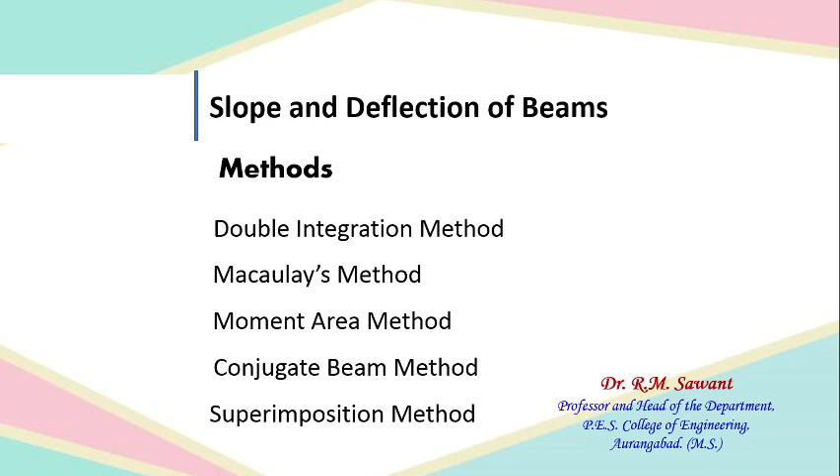Let us first see what are the various methods by which we can find out the slopes and deflections for the various types of beams. First is the double integration method. Another is the Macaulay method, third is the moment area method, fourth is the conjugate beam method, and one more is the superimposition method. Out of all those, today we are going to understand the Macaulay method.

This method is actually a very convenient method. We can say it's a sort of double integration as we did in the double integration method. Here specific rules are set out by which we can find out the slopes and deflections at the required point. The first point to take into account is that in this method we have to take sections between two consecutive forces, loadings, or reactions. There will be a number of forces, including active reactions as well as reactive reactions. There are active forces on the beam and there will be reactions offered by the supports.

So all these active and reactive forces are to be treated while understanding these sections. The first rule is that whatever sections we pass must be taken between two consecutive forces. Next, this particular method is to be utilized whenever we come across point loads or discontinuous type loading. In that case this method works very well. These are the two things we must always follow when talking about the Macaulay method.

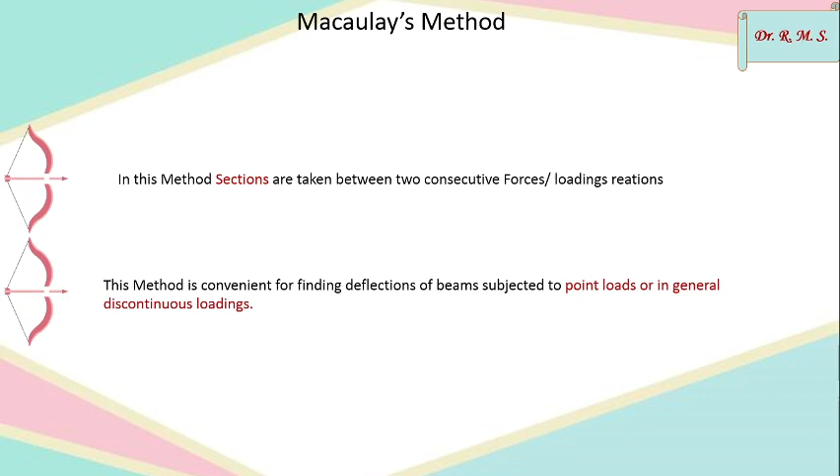Let us see what exactly the Macaulay method suggests and what are the various sets of rules we have to follow for finding out the slope and deflection by the Macaulay method. So here we are going to see the procedure as well as the set of rules.

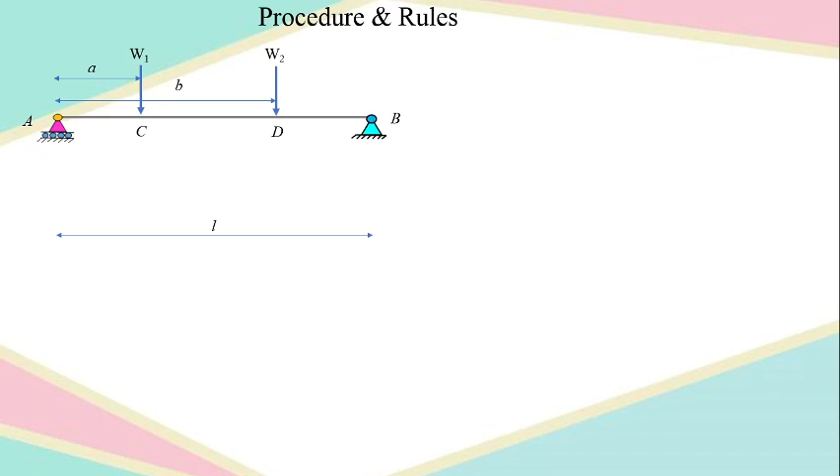Here comes the first simply supported beam which has two loads, point load W1 and W2. The span is L. The line of action of W1 and W2 are also given. W1 is acting at a distance of A from the left end support A, and W2's line of action is at a distance of B, again from left support A.

There will obviously be reactions offered by the supports at A and B, this being a simply supported beam. So first we have to find out the support reactions at A and B by considering the equilibrium of the whole beam. That is very much understood.

Next, what we have to do is take the sections. Whatever rule we just saw, whenever we pass a section, it is to be passed in between two consecutive forces or loads. So the first force is RA, the second force is W1. In between we have to pass a section, and at the same time try to understand what will be the bending moment for that particular section.

Let us pass that section first, at a distance of X from support A. To understand the bending moment here, we have to consider the left hand part of the section, and whatever comes on the left hand side, all those forces' moments are to be taken about this section. For this first section only one force is acting, that is RA, so we can take a moment of RA about the section at distance X.

So what will be the moment? Moment will be RA into perpendicular distance X. What will be the direction? It is going to give a positive value. Why positive? There are two reasons. If I consider clockwise as positive, then it is plus RA into X, or if I think of it in terms of sagging or hogging, then definitely RA is going to sag this beam like this.

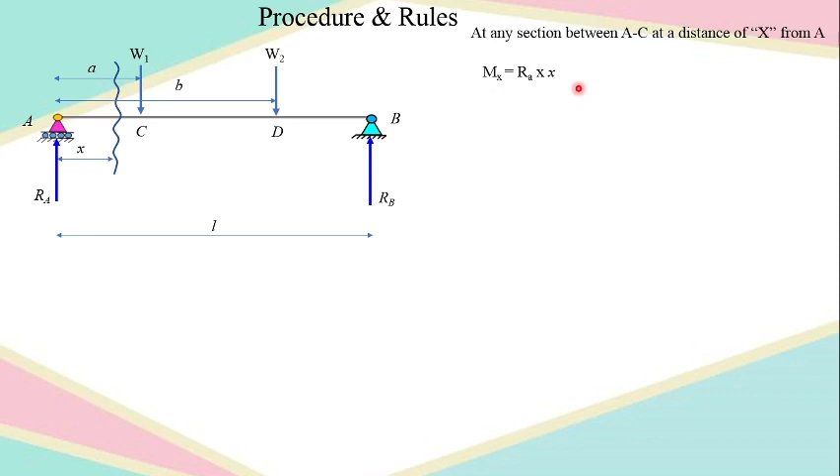Now what we have to do is pass the second section. But prior to that, let us see for what value of x this Mx is going to be valid. This expression of Mx, that is equal to Ra into x, is going to hold good for the value of x from 0 to x equal to a, because the section is passing between A to C. So only for this portion AC this expression is true, and the portion AC is varying from x equal to 0 to x equal to a.

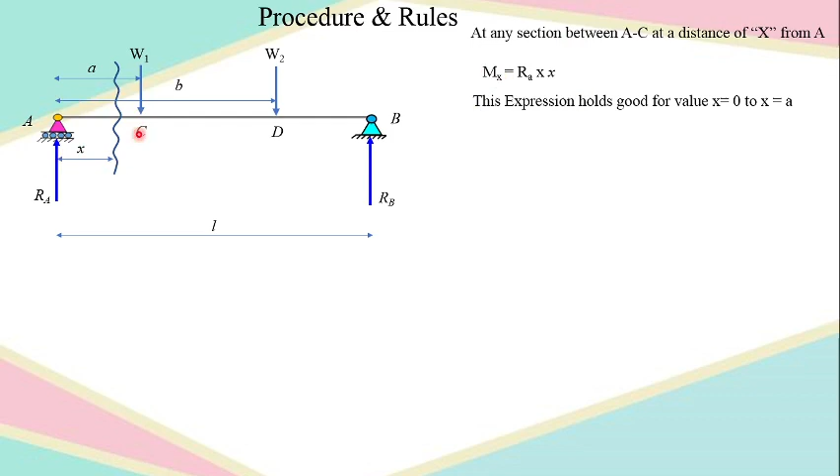Let us take the second section now, between two consecutive loadings, that is W1 and W2. So this is my second section. About this section, whatever is present on the left hand side, for all those I have to take a moment. So let us take the moment: Ra into perpendicular distance x, minus W1 into x minus a.

So let us write that particular equation, and understand that if I write this total moment equation taken about the second section, this is going to be true when the value of x is equal to a to x is equal to b. Why? Because this CD portion is where x goes from a to b. So this is true when the value of x is from a to b.

Let us take the third section now. There is one more feasibility of taking the section here. I can take the third section at a distance of x from point A. Now I can take a moment of all the forces which are on the left hand side. So Ra into perpendicular distance x, that is positive, plus... Ra into x minus W1 into x minus a, minus W2 into x minus b.

So this is the equation for the moment if I take a moment about the third section. Now for what value of x is this equation valid, that is also very important to understand at this moment. So this equation is valid for which portion? First of all, D to B, and the x value lies between x equal to b to x equal to L. So this is the limit for the portion DB.

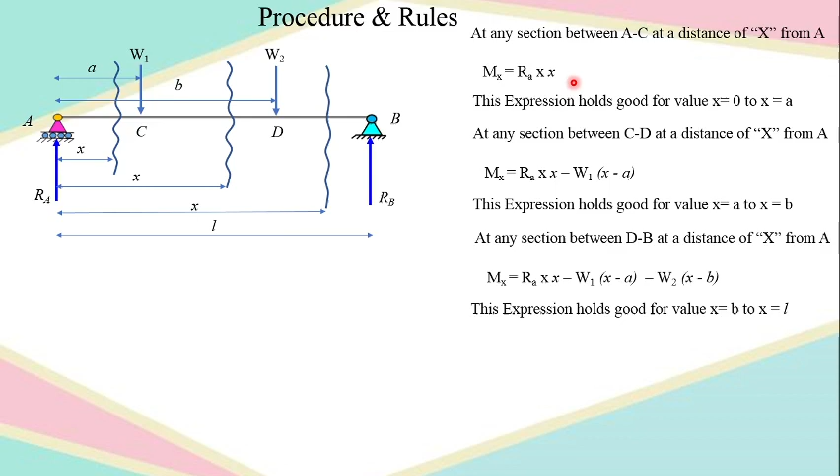So here in general we have already seen what is the generalized equation for the bending moment for all the sections. First section: Ra into x. Second section, extension of that: minus W1 into x minus a. And if I take the third section, minus W2 into x minus b is to be added to that. Now this is the generalized equation for the bending moment.

Now this particular Ra into x is valid from x equal to 0 to x equal to a. So here we can see the value of x is getting increased as we move toward the B support.

So when the value of x is between 0 to a, that means between portion AC. In that case we have to take only the first term. So only the first term is to be considered.

Second, if the value of x is between a to b, where x equals a is here and x equals b is here, then we have to take the first as well as the second term. And when the value of x lies between B to L, the whole length L, then I have to consider all three terms available in this particular bending moment equation. So all three terms are to be taken into account.

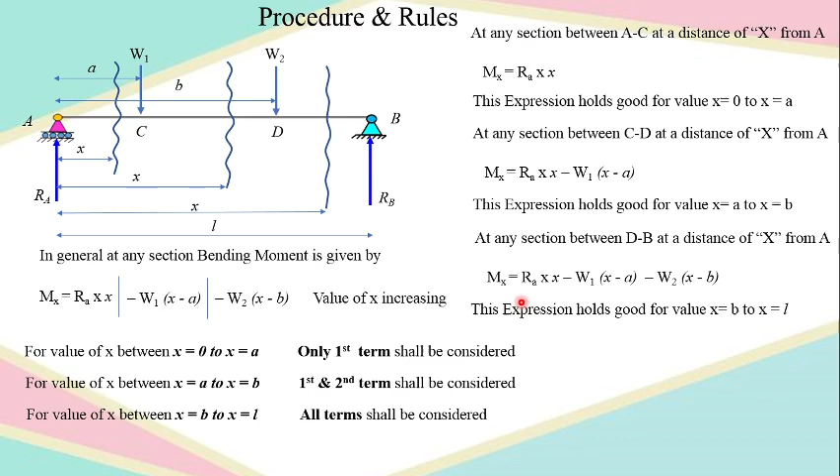Now once we understand this, we have to go back to the governing equation of slope and deflection, which we have already seen in the double integration. And what is that governing equation? That is EI d2y by dx square is equal to mx, right? So this is the generalized equation, and that equation we are going to use onward for finding out the various slopes and deflections at the various required points, right?

Now let us see what are the various rules, as I have said, for doing the double integration here. So let us first see, when we have to use the generalized governing equation of double integration, that is EI d2y by dx square is equal to mx, we should understand I have to integrate twice. So with the first integration, what will I be having? I will be having EI dy by dx is equal to the right hand side integration.

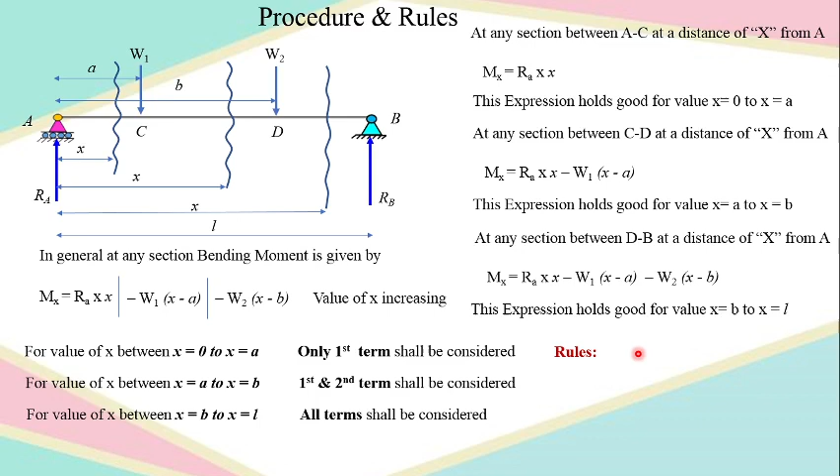Now in this integration, whatever set of rules we shall be coming across, most of them are related to the integration procedure which we are going to follow in this particular methodology of Macaulay. Is that okay? So the first rule is, whenever we are going to do the integrations, definitely we will be coming across the constants of integration.

Now whatever constants of integration we come across, they are always to be written with the first term. After the first integration I will be getting C1, so C1 is to be written after this first term. And if I integrate once again, there will be occurrence of C2, which is also to be written with the first term, not at the last. Usually we write it at the last, but in Macaulay's method, whatever constants of integration we come across are to be always written with this first term of the generalized equation of bending moment, right?

So the second rule is: whenever we have to do the integration of these brackets, it is always to be done as a whole bracket, like x minus a square by 2. We know the integration of this is x minus a to the power n plus 1, divided by n plus 1. So here this bracket will come out to be x minus a square by 2. So here I have shown this - if I have to integrate this, it is to be integrated like this.

Usually what we could have done is x square by 2 minus ax, but that is not true. We should not do the integration like this. So this is the second rule related to the integration which we have to follow.

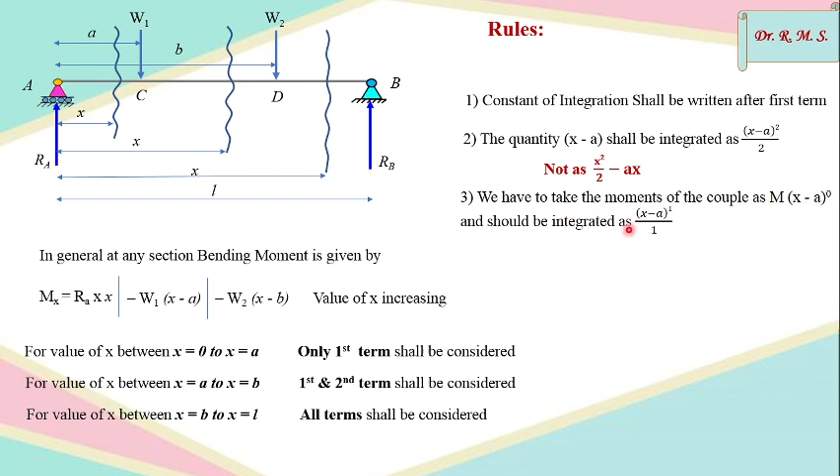When we integrate this term, how do I integrate it? X minus a raised to 1 by 1. Why? Because the order or index of this term is equal to 0, and degree of index plus 1 divided by degree of index plus 1, so here 0 plus 1 divided by 0 plus 1. This is how we do the integration when there occurs a couple. First we take the moment of a couple, then integrate it in this fashion. I hope the third rule is understood.

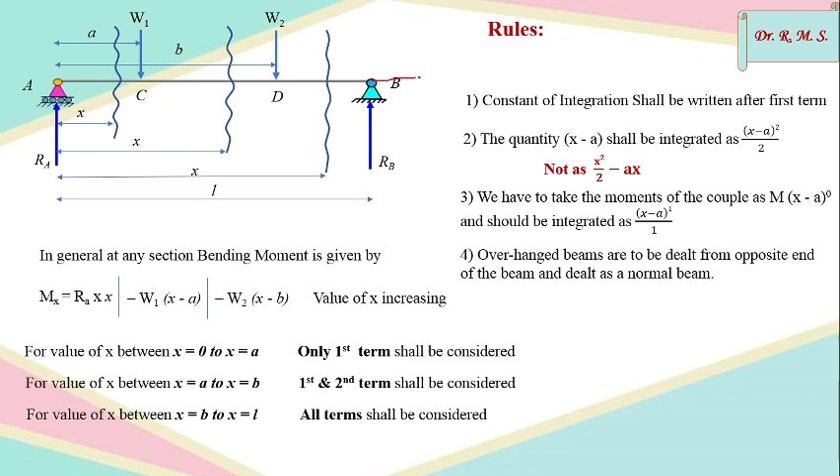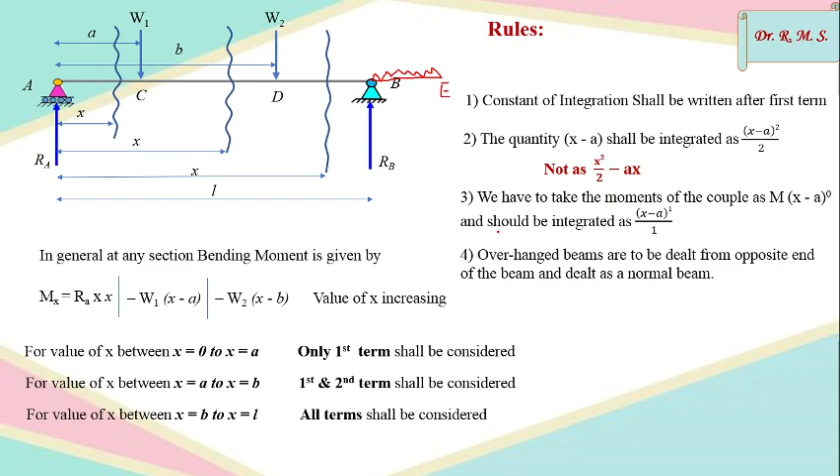So these are the various rules which we have to follow, and once we follow these rules, we will definitely get the solution by Macaulay's method. I hope all the rules and regulations are very much clear to you all. So let us see now what is to be done further.

So here I have a generalized equation of the bending moment. Now this bending moment equation is to be substituted in the governing equation which we already saw in the double integration method: EI d2y by dx square is equal to M. So this is the generalized equation mx. Put the value of mx here, this is the bending moment for all the sections, first, second and third. So I have substituted the value of mx.

Now, in order to find the slope from this governing equation, I have to integrate once. If I integrate once, I get EI dy by dx is equal to RA x square by 2 plus C1, which is the first constant of integration written with the first term. Now what remains? Second and third: minus W1 into x minus a whole square by 2, minus W2 into x minus b whole square by 2. This is how I did the integration, sticking to the rules we already saw in the earlier slide. The constant occurred here, and as per the second rule, the bracket is to be integrated as a whole.

So x minus a was there. So I have integrated the bracket whole square by 2. Now just follow the next step.

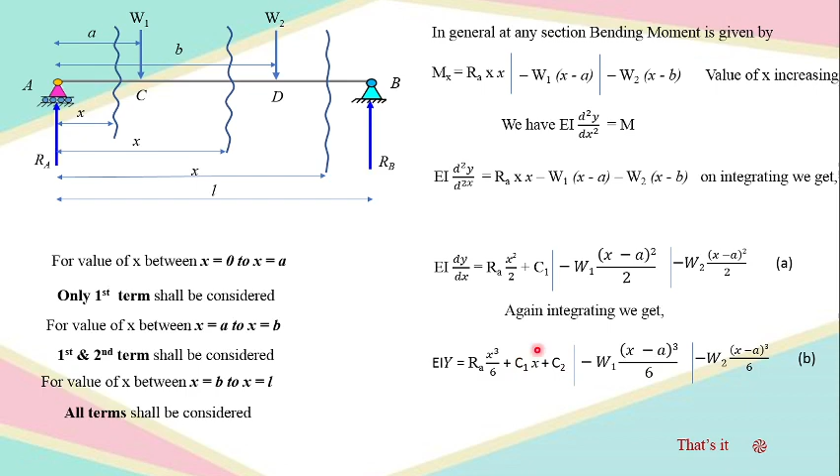Let us move ahead and try to understand how these values of C1 and C2 are to be found out. Here we are coming across certain methods by means of which we can find out the constants of integration. So the first method is boundary conditions, the second is continuity conditions, and the third one is the symmetrical condition.

Is that okay? So these are the three various methods by means of which we are going to find out the constants of integration. Let us see one by one now.

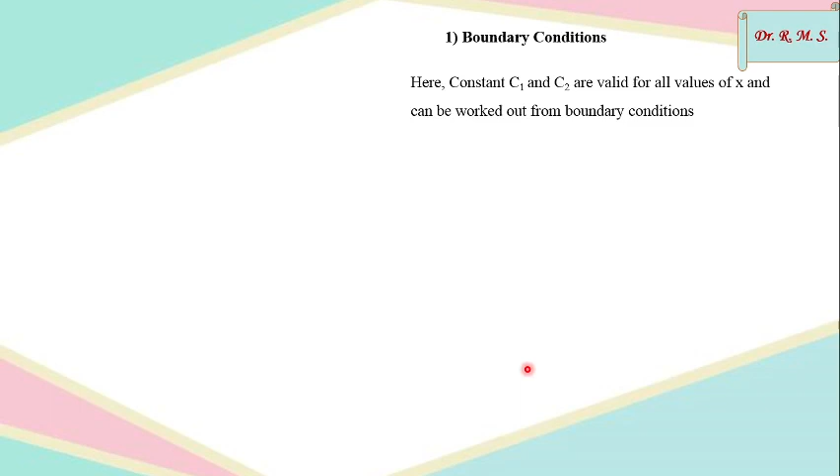So here comes the first method, the boundary condition method, by means of which we can find out the value of C1 and C2. This is a simply supported beam supported at A and B. Let us find out what are the boundary conditions for this, and for what purpose we are trying to understand the boundary condition.

All the boundary conditions are to be understood with respect to only the slopes and the deflection. So let us see where is the slope, where is the deflection, where it is maximum, where it is minimum. Let us see that.

In order to understand that, what I have to do first is draw the elastic curve of a bent beam. So after loading it is going to bend like this, and after that we are able to understand where there is a slope and where there is a deflection.

So here at point A it has not been displaced, meaning there is no deflection at point A. Even at point B there is no deflection. Now as far as the slope is concerned, how do we understand a slope?

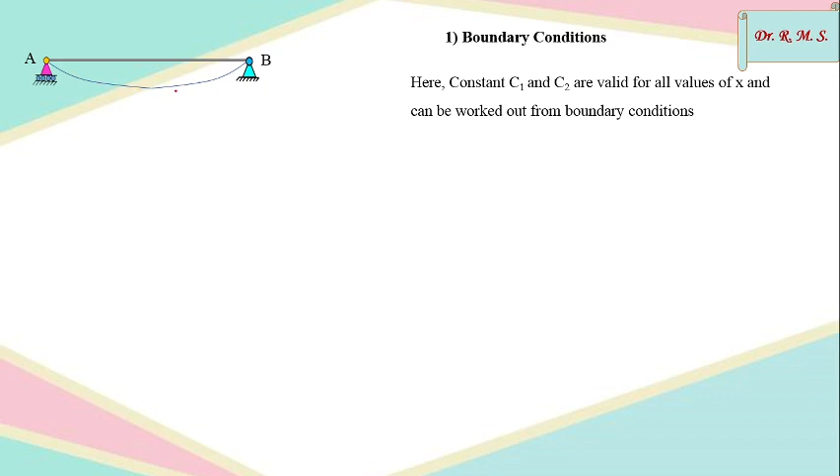Whatever elastic curve we have, wherever we have a maximum elastic curve, there we have to draw a tangent. So the inclination of that tangent is called the slope. This is what is a slope.

So here, about which point am I finding this out? I am finding it out about point A. So this is the slope dy by dx at point A. It can also be called IA, where I is designated for the slope.

As far as the deflection is concerned, here once again I have to draw a tangent to the maximum curvature. So what is happening here? This tangent is almost horizontal or parallel to the axis of the beam. So the slope is zero here.

All of you getting this now? So from these two you can understand what is the deflection at A, what is the deflection at B, what is the slope at A, and what is the slope at this particular center where there is another, the maximum, curvature.

Is that okay? So let us talk in terms of the value of distances, that is with respect to x. X is equal to 0 at A, and x is equal to L at B.

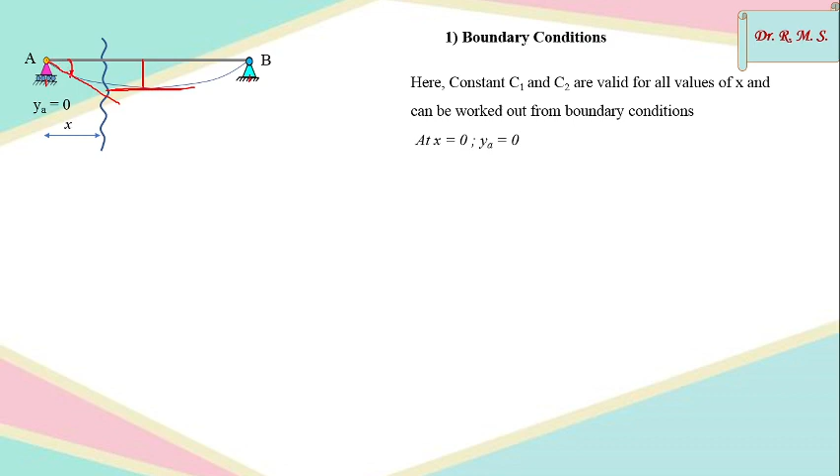So at x is equal to 0, y is equal to 0. You can see here at x is equal to 0, y is equal to 0. And how much is the slope? It is maximum, that also can be found out. But you can see here, at x is equal to L by 2, the center deflection is maximum.

At x is equal to L, that is point B, how much is the deflection? 0. So at x is equal to 0 and at x is equal to L, where there are supports, the deflections are minimum, that is 0. And how about maximum deflection? Maximum deflection shall occur where there is minimum slope, that is slope is equal to 0. So where slope is equal to 0, we get maximum deflection.

So here we can say at x is equal to L by 2, deflection is maximum, and at x is equal to 0, slope is maximum, with minimum slope occurring at the center. These are the boundary conditions which are to be utilized for finding out the constants of integration, C1 and C2.

This was related to a simply supported beam. So whenever it comes to a simply supported beam, always remember at the support, at x is equal to 0 and at x is equal to L, there is 0 deflection. But at x is equal to 0 and at x is equal to L, we will definitely be getting maximum slope. So at x is equal to 0, y is equal to 0, we get maximum slope, and at x is equal to L by 2, we will be getting maximum deflection. This is the set of boundary conditions for the simply supported beam.

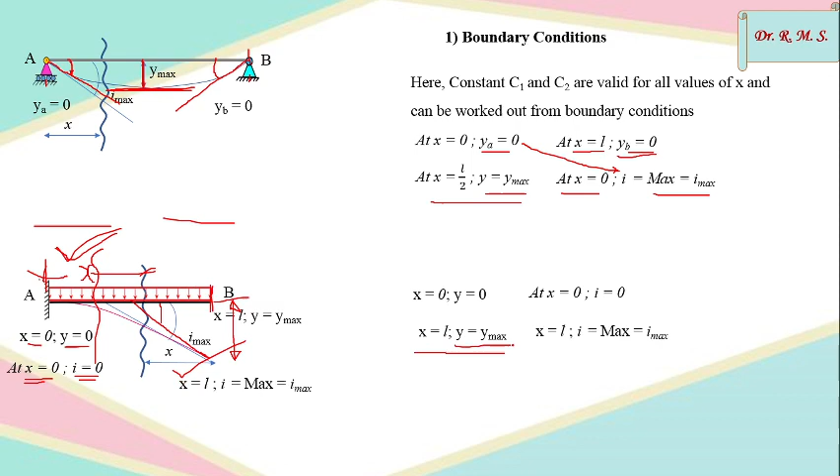As I am going to measure x from the left hand side, at x equal to 0, deflection is 0, and when x is equal to 0, slope is also 0. Here you can see I have shown a tangent, so this is given as the maximum slope. Maximum slope is where, when x is equal to L, meaning from here to here the value of span is equal to L, there will be maximum deflection. So this is another boundary condition for the cantilever type of beam.

I hope you have understood. It is a matter of understanding from which end you are going to measure that particular distance. If x is measured from this end, so this is the thing. If I measure x from B towards A, then things will be reversed.

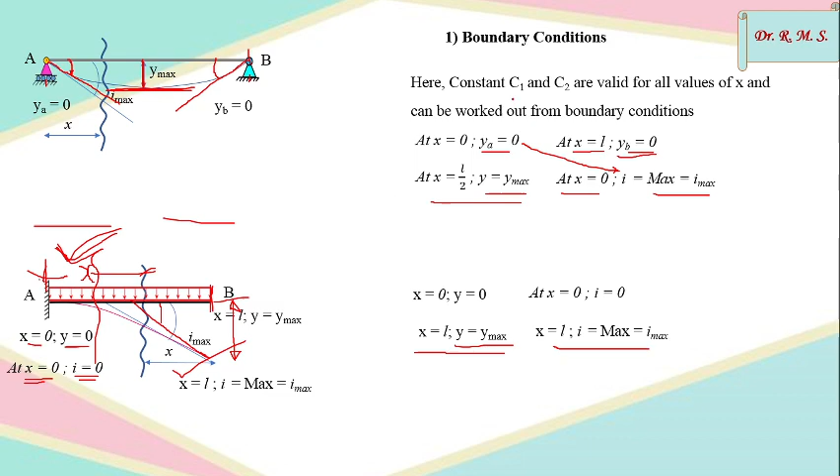So this is how we have to find out the boundary condition, and after selecting this standard condition, whether it is a simply supported beam or a cantilever beam, accordingly you are going to take your boundary conditions and put them in equation number small a and small b from the earlier slide. You will be able to find out the value of C1 and C2 by the boundary condition method. The second method is the continuity conditions.

Now here this is again a simply supported beam, and I am interested in finding out the slope and deflection about point C. Whether you start working from left to right or right to left, in the first condition I will find out the slope and deflection from this end up to C. In the second case, from this other end I will find out the slope and deflection about point C. It is going to be one and the same.

Why? Because this deflected part has its continuity on the B support, or till point B it is continuous. So it is possible to find out the deflection at this C point from the left hand side part, and whatever magnitude we get will be the same from the right hand side part. So deflection at C determined from the left hand part shall always be equal to the deflection at C found out from the right hand side part.

Similarly for the slope, slope at C from the left hand side is equal to slope at C from the right hand side. Why? Because there is continuity of this particular elastic curve beyond point C towards right as well as towards left. So it doesn't matter whether you start from left or right, you will definitely get the same magnitude of slope and deflection at this particular point C.